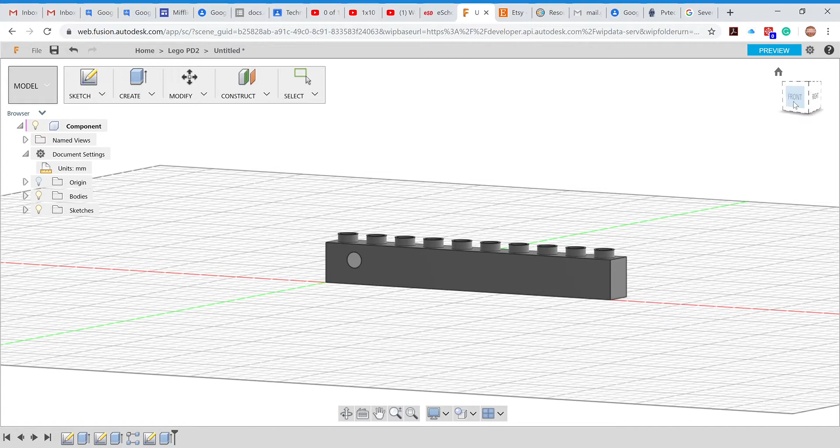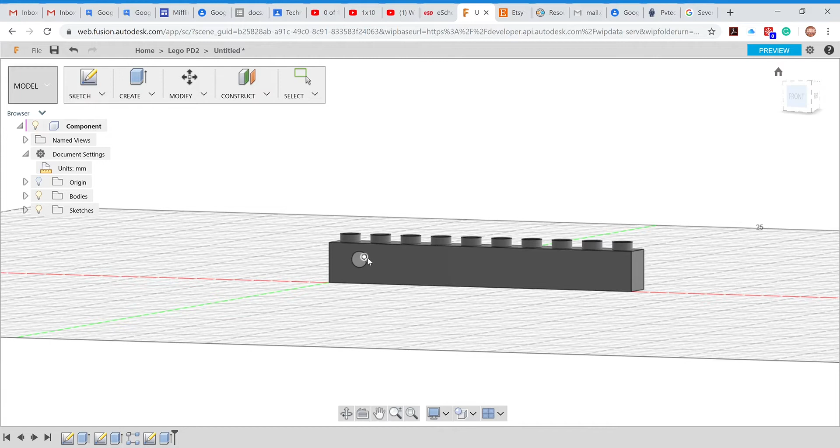Okay, so here we go again. We've created our basic rectangle and the stud tabs on the top. And from the last video, I created one hole, the smaller hole going all the way through. And within the sketch, as you can see, I have placed the circle, or the center of that circle, using the sketch dimension exactly where it needs to be before I go ahead and do my rectangular pattern.

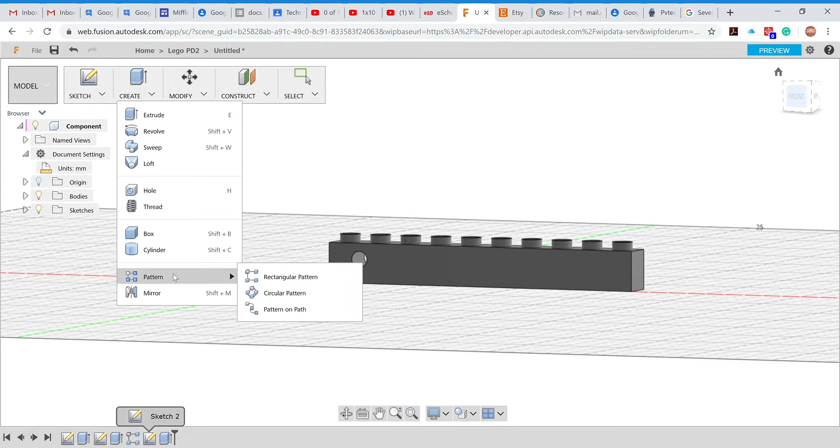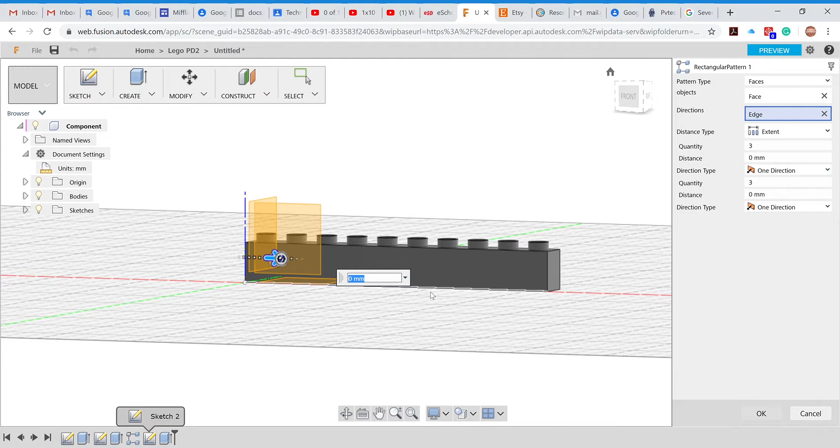So we're going to create another rectangular pattern, and it's asking us questions. There are the questions up here. What is it that we want to create the pattern out of? Well, I want to make this circle, and direction, I want to choose an edge that is going to go in the same direction, and the distance shall be spacing, and the quantity should be 9 at a distance of 8 millimeters.

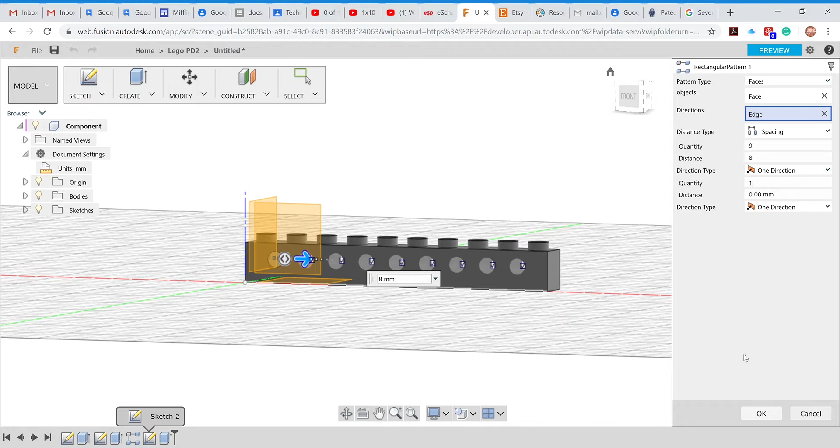And in your other direction, again, patterns usually come in rows and columns, we're just doing a row in this instance, so the quantity, we still need 1, we don't need any more than 1, but we still need that 1 at a distance of 0 because it's just the 1. We'll go ahead and click OK, and there's our circles all the way through. You can see everything rotated around. You can see it on both the front and back side.

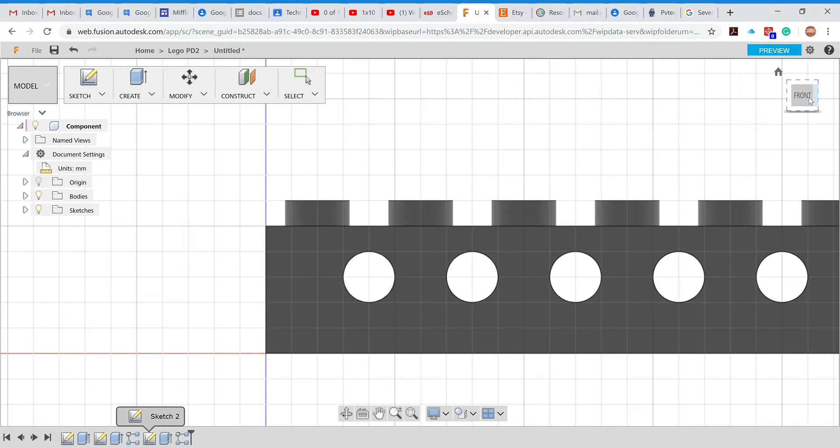Next thing we need to do is create another sketch, and we're going to add the larger diameter, or the extrusion, to the outside of this. And again, the reason we're doing this separately is because when we create the pattern for these, or we go to mirror it, if we try to mirror this circle that's going all the way through, I don't know if it's the browser version, again, I'm fairly new to the browser version, so I don't have an exact answer, but my guess would be that it's going all the way through.

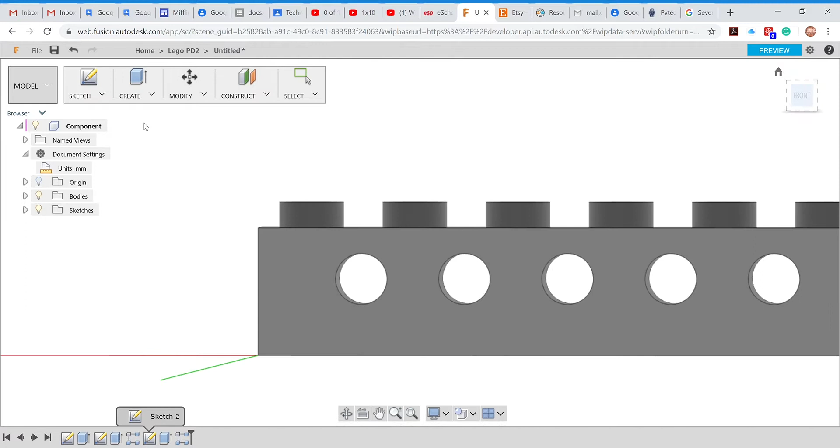So if you try to mirror that on both sides, it's kind of going back and forth against itself. Is my guess. Again, I'm not 100% sure on that, but it doesn't work. So let's fix it. Let's do something else. Work our way around it. Let's create the sketch, circle, center of the circle.

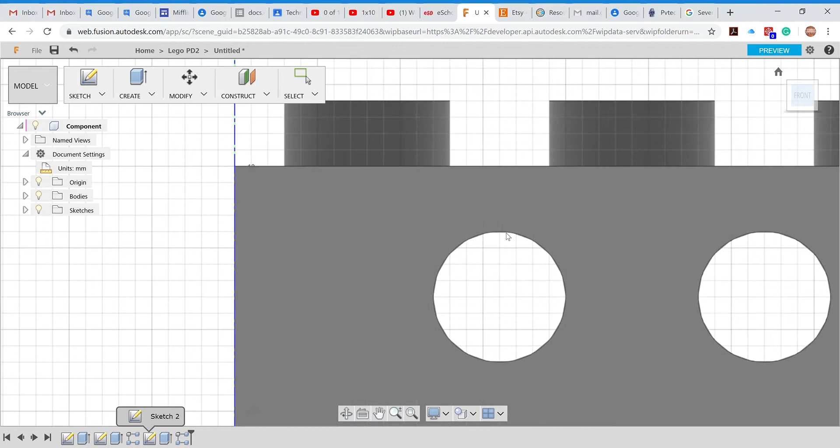You need to be careful here because as soon as you pull this up, it asks for this plane. Remember, you don't want the plane. You want to choose the face, where we're going to draw on this face and not this plane. So don't just go ahead and click. Make sure that you're choosing the face of this side, and it'll take us into sketch, and we should be able to find that same exact center. Let's zoom in a little bit to ensure that we're on the same.

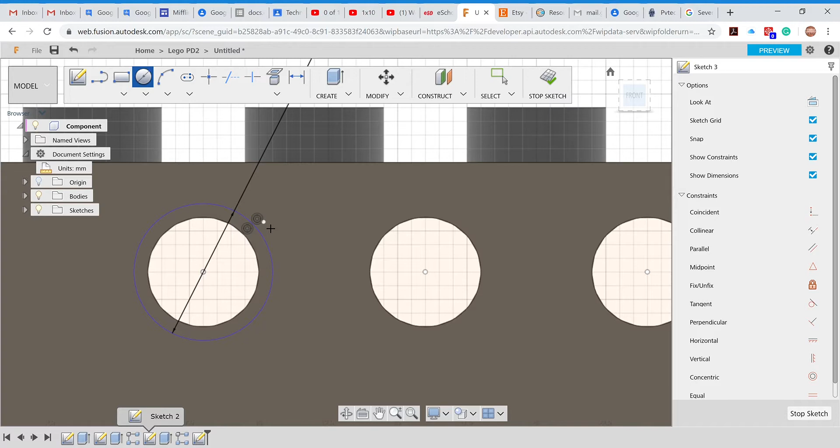And the other circles were 4. These are going to be a 5 millimeter. So we'll type that in. And we only need to do one. We don't need to dimension because it's all based off of where this first one was. So we only need to do that dimensioning once. And we just need to stop this sketch and go ahead and extrude just the donut shaped area, not the inside of the circle, but just the donut shape. And make sure we have this tilted to the way that we want it to go.

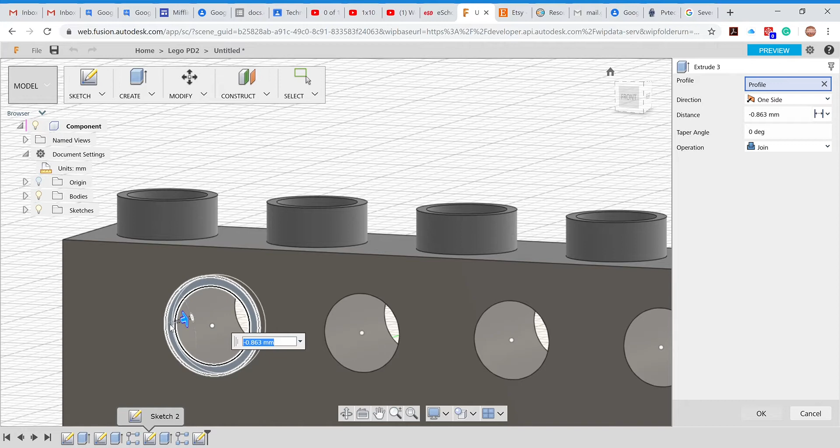And this is going to be a negative 0.5, or half of a millimeter, extrusion. So you can see there we have our extrusion again. Again, the extrusion in this instance, on mine, is going to be a negative 0.5. Yours should be that as well, but if not, it's just a half a millimeter indentation or extrusion in.

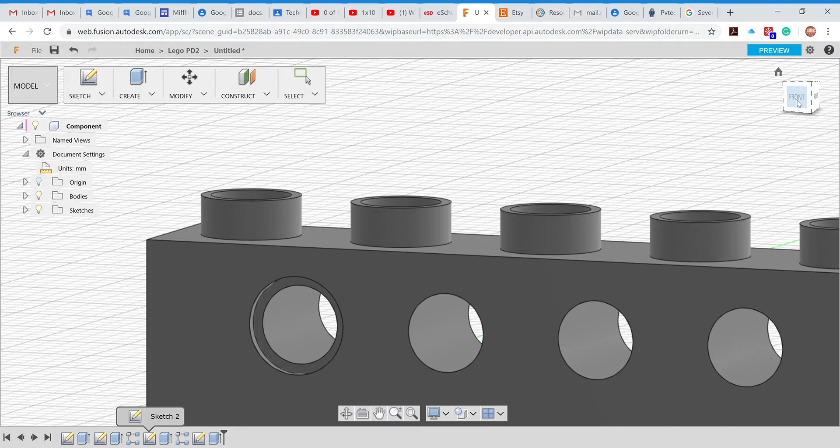Now that we have that, we can stop the sketch, and from this we can create our rectangular pattern to extend these down to the rest of the circles along this face. Now we're not doing the other side. Basically we're going to do the rectangular pattern, then we'll create the plane in order to mirror it, so we can mirror all of those extrusions or indentations to the other side. Let's go ahead and do that, under Create, Rectangular Pattern.

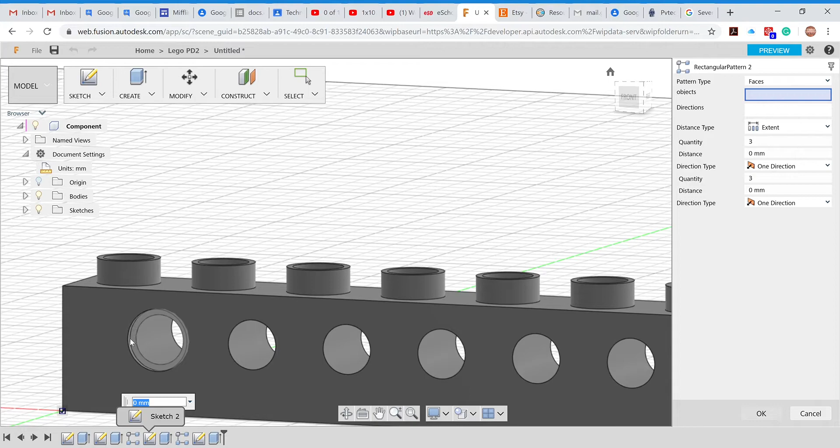The questions that we have up here are, what are the objects we want to, I'm sorry, make the pattern out of? Well, we want this flat face, and I do believe we want this outside face in order to make that happen. The directions in which we want it to go, it's just going to be one direction as we're only doing one row.

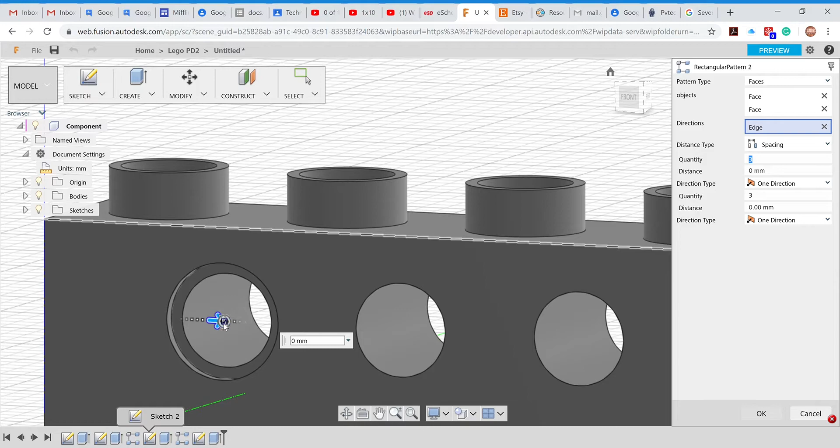Your distance should be spacing again. It's just easier. If you want to do extent, remember it goes from the center of the first circle to the center of the last circle. So the extent from this point to this point will be the extent of where those circles can go. That's if you're using extent. So you would need to measure this entire distance from here to here.

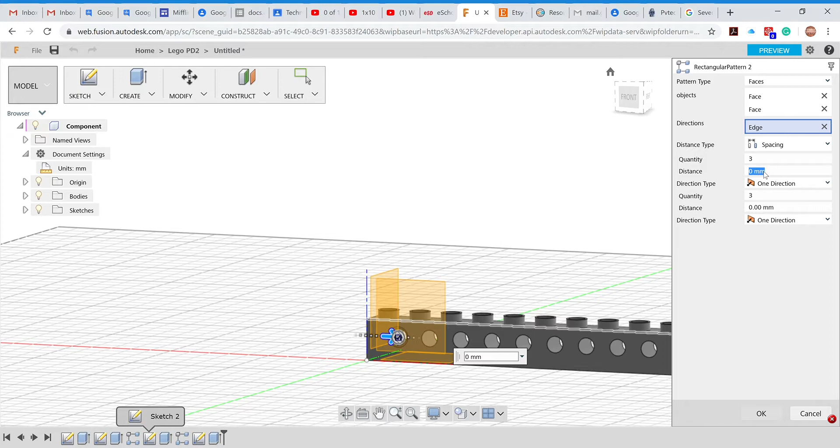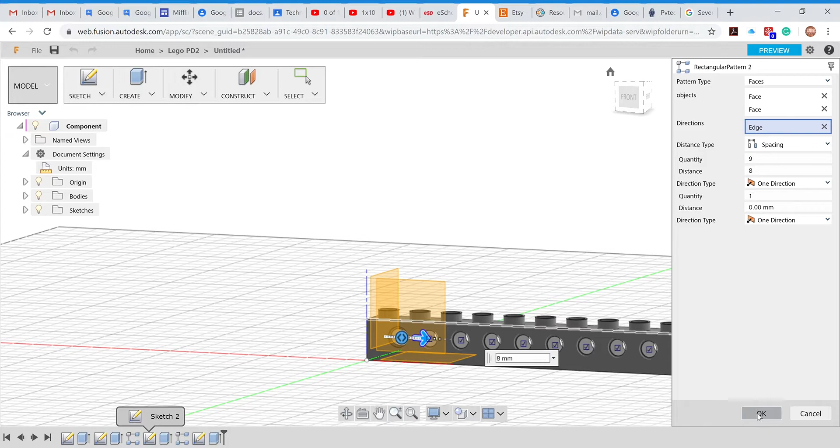If we just use spacing, we know that the spacing is at a distance of, again, 8 millimeters, and the quantity should be, again, 9, because that's how many circles we did before. And we're not doing any columns, we're just doing rows, so we only need one. I'm sorry, you know what I mean. We only need one row of these, not multiple columns. And then once we have that, we should be able to click OK, and it should give us our indentations for the rest of those surfaces or circles all the way down the side there.

Okay, so that is creating the rectangular pattern, or the extrusions, the holes in the front face, and then also your extrusion just on one side. So next we'll go through and create a plane that we can mirror, so that we can get these other sides.